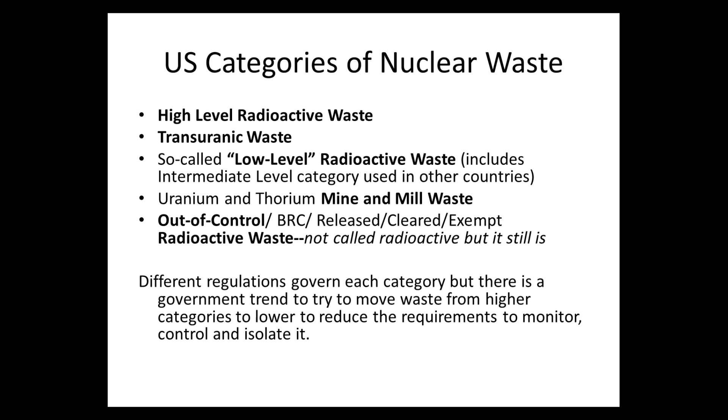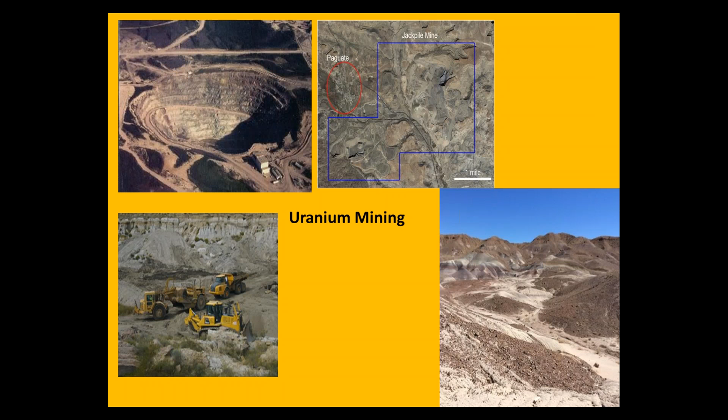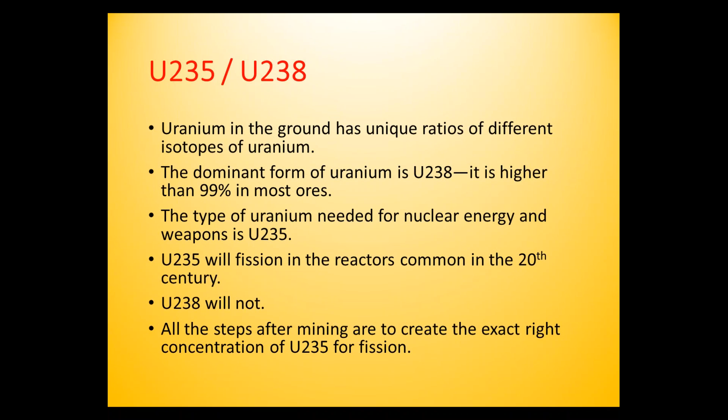Uranium, when it's in the ground, is not that concentrated, so it is mined, leaving enormous amounts of waste. There are several isotopes of uranium. Uranium-238 is the highest percent, and uranium-235, which is the lowest percent, is the one that's needed to make nuclear power and nuclear weapons. So the uranium is mined, it's milled, it's processed, it's formed into fuel pellets, which are very tiny, and then these pellets are stacked into rods that are assembled into bundles or assemblies, and several hundred of these go into the core of nuclear reactors and fission.

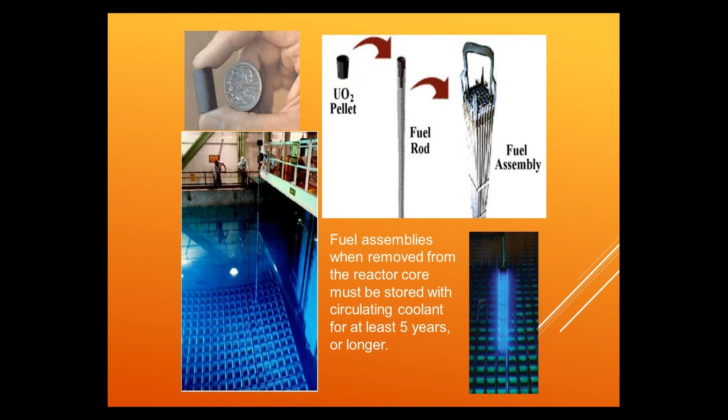The uranium-235 is split, fissioned. Its binding energy heats the water, which turns the turbines and makes electricity, and the fuel itself and the assemblies get clogged up with fission products and activation products and transuranics. So the uranium, when it first starts out, could be held in your hand, but by the time the fuel assemblies come out of the reactor, they are millions of times more radioactive.

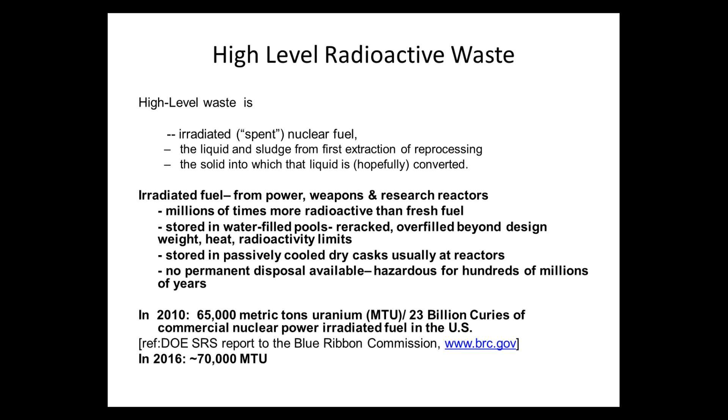The industry and government generally call it spent or used nuclear fuel. We refer to it as irradiated fuel because it is millions of times more radioactive when it comes out of the core. And in fact, fuel from nuclear power reactors really has about 99% of the radioactivity in the whole nuclear power and weapons fuel chain in those assemblies, and then sometimes it is reprocessed.

The U.S. does not reprocess now, but Gordon will talk about that a little bit. Reprocessing actually makes the problem worse because they chop up the assemblies, dissolve them in chemicals, and extract the uranium and plutonium, leaving all the other radioactive elements, cesium, strontium, iodine, neptunium, others, in a liquid and sludge. So the problem then is more difficult. So we're focusing tonight on the irradiated fuel that comes out of the reactor core.

And we can move to Gordon. We'll have Gordon Thompson now tell us a little more about the storage and management of that irradiated or spent nuclear fuel after it comes out of the reactor core. It stays in the core for maybe 2, 3, 4, 5 years, and then it is moved into fuel pools. And this is all done remotely because it would give a lethal dose in just a few seconds if people were exposed unshielded.

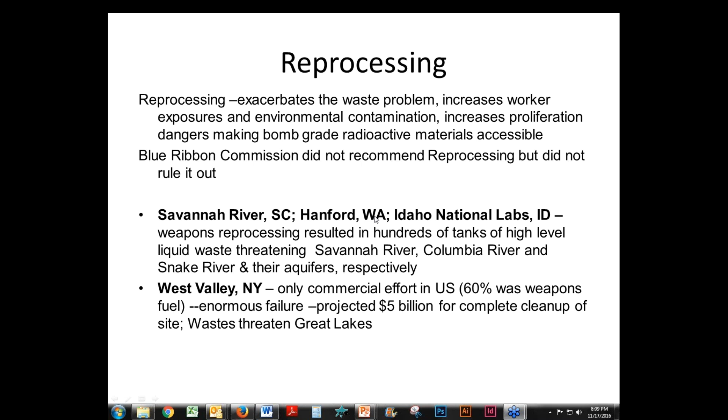So Gordon, we're transferring over control of the screen to you. Okay. Can I click on share my screen? Yes, there you go. If you want to put your slides in display mode, then you're ready to go. You want to tell them how to do that? Okay. How's that? Your notes are showing. Well, on my screen it's in display mode. So you could move the pictures on the left. Yeah. Try that one. How are we doing now? Looks the same. Let's see.

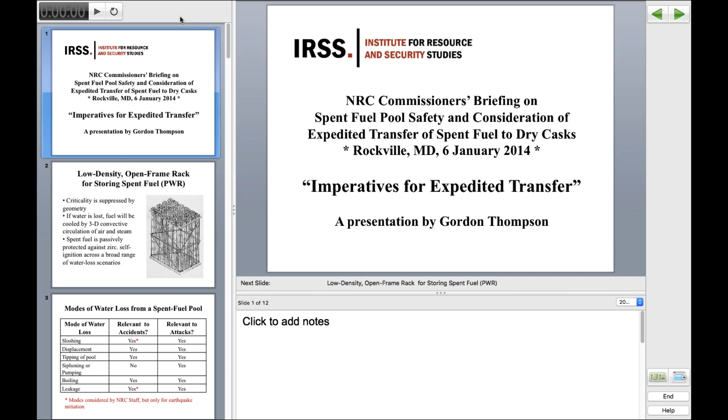Now it's not showing. On my screen it's in display mode, but I guess not on yours. No. I don't know how we fix that. Do you have it up on your machine? You could display it? Certainly, yeah. Yeah, we could show it from here. This will be my January 2014 slides. Okay. You have it? Yes, I do. I think I have it queued up right now. Okay. And I'll just tell you when to advance. Can you see what I'm displaying now, Gordon? Yep. Okay. So we're good to go.

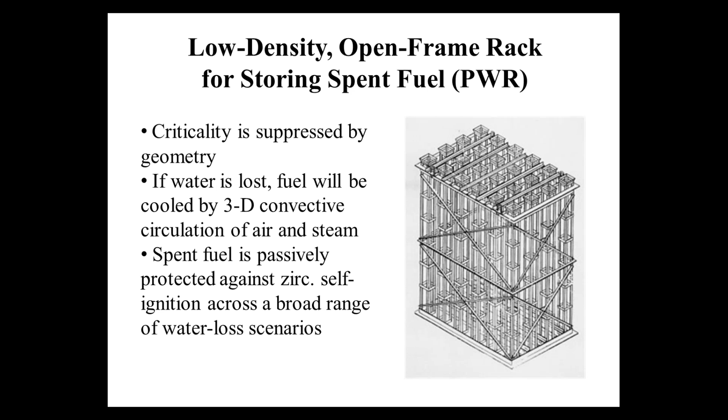The racks are closed because to suppress criticality, it was necessary to have plates of boron-containing material between each fuel assembly. That created a very severe accident potential which continues to exist today. And that potential arises if a pool loses water for any reason. Next slide, please.

And this is an array of circumstances whereby a pool could lose water. And at the Fukushima unit number 4, the top left mechanism, sloshing, was significant for two reasons. The first, earthquake caused sloshing of the fuel, and then the hydrogen explosion that occurred later in the accident also displaced water. So about 1.5 meters of water was lost from the Fukushima number 4 pool through the sloshing mechanisms.

Water was lost over time by boiling from that pool. That's the second from the bottom. And there was leakage. Fortunately, the leakage at Fukushima number 4 was into the pool by very fortuitous chance. And the outcome could have been much more severe if there had not been that inward leakage.

The staff of the NRC considers only the modes with the red asterisks, and only for earthquake initiation. So the majority of scenarios for water loss they simply don't consider at all. Next slide, please.

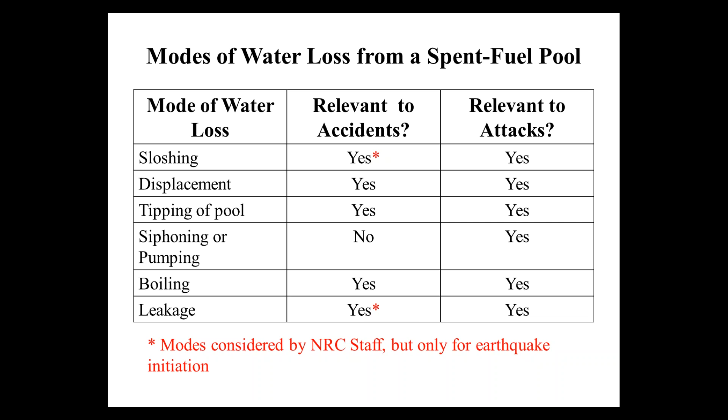This is the worst situation that arises if water is lost from a pool, and I've termed it the severe reference case. And that's where there's a residue of water in the bottom of the pool, and that residue of water prevents circulation of air, meaning that the upper portion of the fuel assemblies are cooled only by steam. As I explained earlier, steam will react with zirconium and produce hydrogen.

We actually have had an experience like this at a small scale at a plant in Hungary in 2003, the Paks-2 unit. Fortunately, that occurred in a closed vessel, but it proved the physics of what I'm talking about. Over all the years that this fire potential has been an issue, the NRC has consistently refused to study this severe reference case. So the most important case, the worst case, is the one that they simply refuse to consider. Next slide, please.

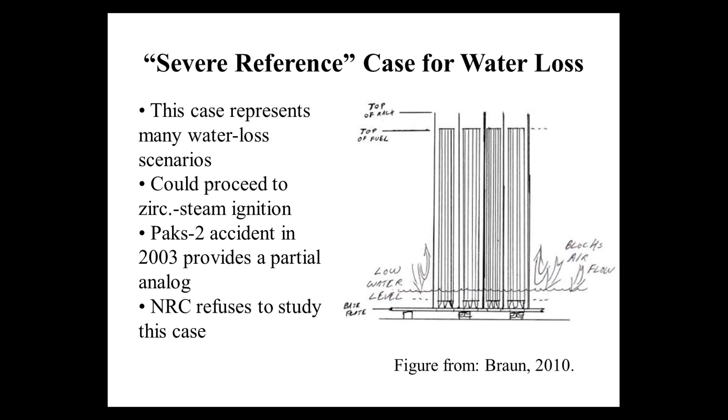Now, if water is lost from a high-density fuel pool, the zirconium cladding doesn't start burning right away. There's an ignition delay time while the fuel heats up to the ignition point. And if the fuel is aged 1,000 days or roughly 3 years, you're looking at a day or a bit less for the fuel to heat up and catch fire.

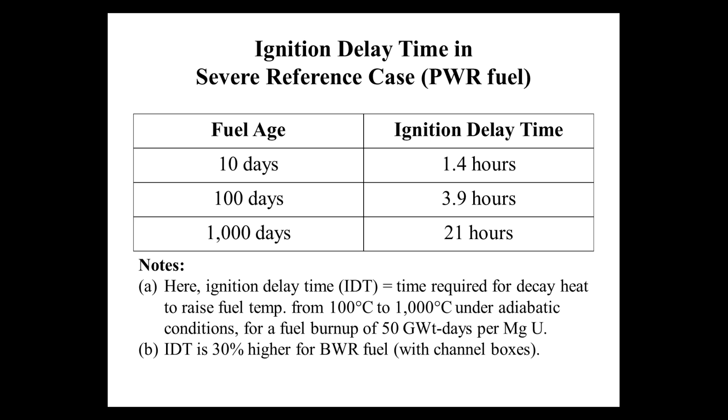So many people in the industry and in regulatory bodies like NRC say, well, no problem. If this situation ever arises, we'll just rig a bunch of fire hoses and spray water on and everything will be fine and dandy. And they do actually have now, post-Fukushima, additional capabilities to do that. They have more portable pumps and fire hoses for cooling purposes. However, they have neglected a very important matter, which is shown in the next slide,

which is that a reactor release could contaminate the site such that approach to the site would be impossible due to the extremely high radiation fields. And the numbers shown indicate just how high those fields are and how impossible it is for any human to approach. And this is extracted from testimony I gave in the year 2000 that was disparaged by industry and by NRC witnesses in that case. It was to do with the Harris plant in North Carolina.

The Fukushima incident of 2011, of course, proved the point that I had been making back then in 2000. And you may recall, those who were watching television at the time, efforts to drop water from helicopters into the spent fuel pools. And eventually a concrete pumping truck was brought up to the site and did succeed in adding water, although not terribly effectively. And as I mentioned, leakage into the pool was actually the saving factor in that incident. Next slide, please.

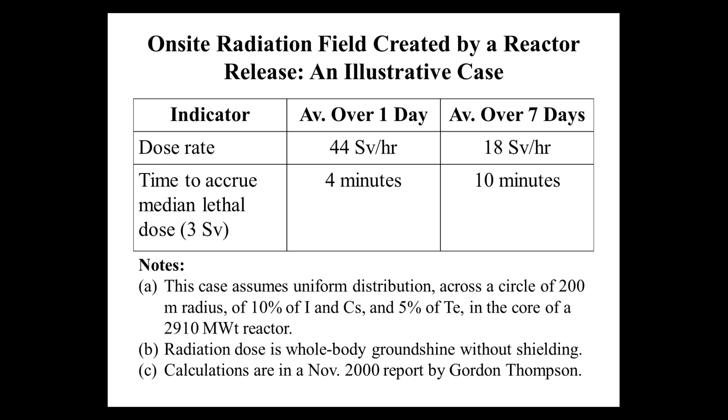So what do we have to worry about here? Cesium-137 is the key isotope to worry about. It has a 30-year half-life. In its decay, it produces a very intense gamma radiation. And the amount released at Chernobyl in 1986 was approximately 85 petabecquerels of this material. Petabecquerel is 10 to the power of 15 disintegrations per second. It weighs about 300 grams. You could hold it in your hand, but you wouldn't live very long if you tried.

The fact that such a small mass produces such dramatic effects is instructive about the hazard of nuclear power. Best we can tell, at Fukushima, about 6 petabecquerels fell on Japan out of a total release that has varying estimates. The one I'm quoting is 36 petabecquerels. There are still ghost towns in the Fukushima fallout zone. I was actually in one about a month ago, a deserted ghost town, Tomioka.

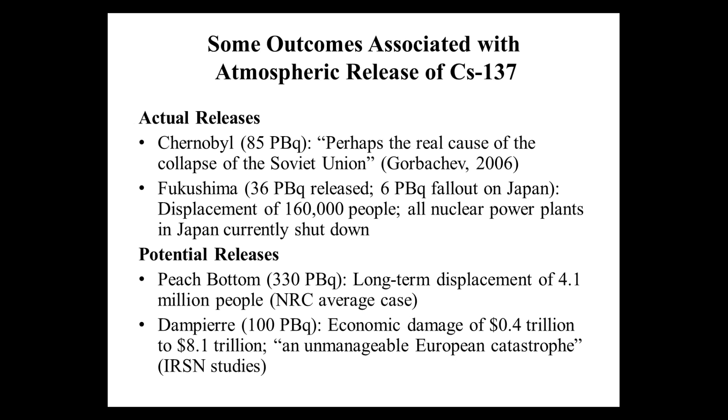The French Research Institute, the IRSN, looked at a potential release of 100 petabecquerels at the Dampierre site in France. This is a reactor release, and concluded that that would be, in their words, an unmanageable European catastrophe. So how much is available for release? Next slide, please.

Peach Bottom, 2 pools, each with more than 2,000 of these petabecquerels. And Fukushima Unit 4 pool, about half that much. And the ghost towns in Japan that I was visiting come from a release of 6 petabecquerels. And of course there are many, many acres of waste dumps of contaminated soil that the government is piling up in the Fukushima zone. A single dry cask in this last case is a little under 70 petabecquerels. Next slide, please.

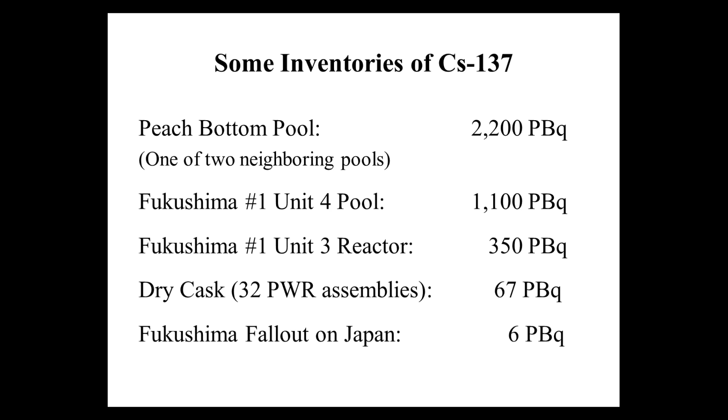So the NRC refused to act on this problem because they say the risk is low. And they define risk as the product of probability and consequences, under the claim that that's a scientific definition. I regard it as ideology, and testified to that effect to the commissioners, who were not persuaded. Both probability and consequences are difficult to estimate, particularly probability. If deliberate action is possible, then it's exceedingly difficult, potentially impossible, to assign a probability.

And at the bottom, I point out that, as I said earlier, the NRC has refused to consider the most serious case. They made an assumption that the only safety issue was rapid instantaneous loss of water from the pool. And it's remarkable that they made the same error back in the 60s in terms of reactor design, focusing on something called the large break loss of coolant accident. And that's why we have such badly designed reactors and containments, because they made a similar error in the 60s.

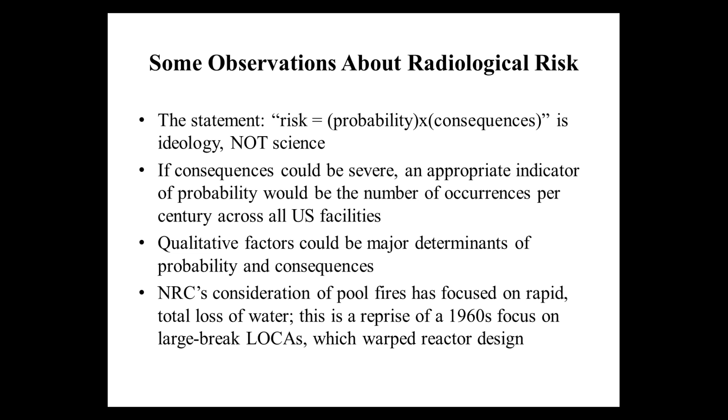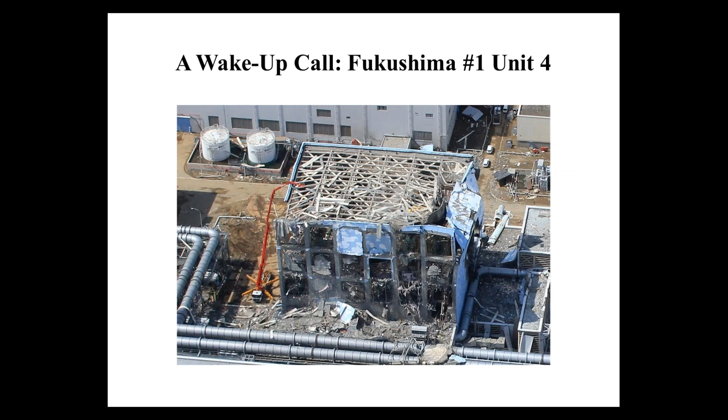Next slide, please. Here's Unit 4. As I described, the pool is in there somewhere. You'll see the concrete pumping truck on the left. Next slide.

And switching to open frame racks, to do that, we'd have to transfer fuel to dry casks. Donna's going to show you lots of pictures and talk about dry casks. The spent fuel is going to have to go into those anyway. You can see this happening at plants all across the country, and at decommissioned plants like Maine Yankee, the dry casks are all that's left on the site. And the cost of this transfer is actually simply the cost of money, the incremental cost of doing it now. So the cost is scarcely an issue, and the potential consequences are vast. Next slide.

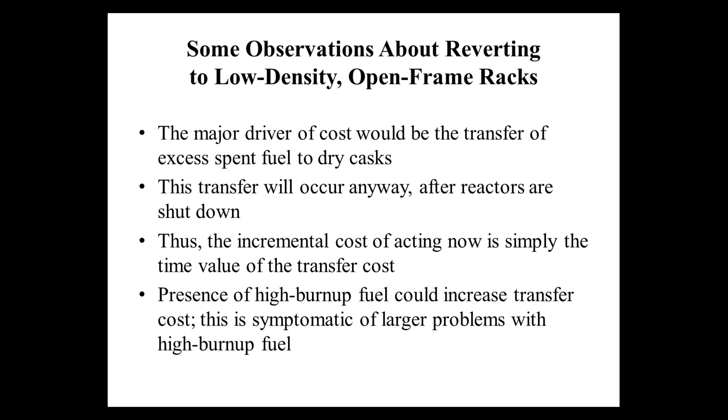And this is the final slide. I'm saying here that the commissioners should scrap the studies done by the staff, the NRC staff, and that's true of similar regulators elsewhere; the nuclear industry has never done an open science-based inquiry into the hazard I've just described. But that hazard exists in many places. There's a major example in France of the La Hague reprocessing plant.

And on a personal note, I first became aware of this problem in 1978, and testified to that effect in Germany in 1979. My findings were accepted, and the state government at that time refused to permit high-density storage of spent fuel at the Gorleben site. So I've been pushing on this issue for now 38 years, and have never encountered on the part of industry or regulator a scientific response. So if anyone tells you this is a fast-moving, cutting-edge, science-based industry, I can tell you from personal experience that it's anything but. Thank you.

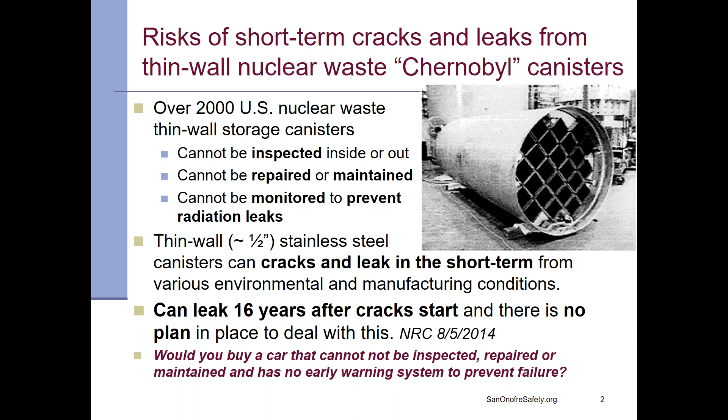When you're explaining this to people and they're reluctant, say to a city council, to sign a resolution, put it in terms of a car. Wouldn't you expect to at least be able to inspect, repair, and maintain or prevent a leak just like a car? Elected officials don't feel qualified to make recommendations for dry storage, but we successfully convince them to sign resolutions for these basic requirements. So that's a suggestion there.

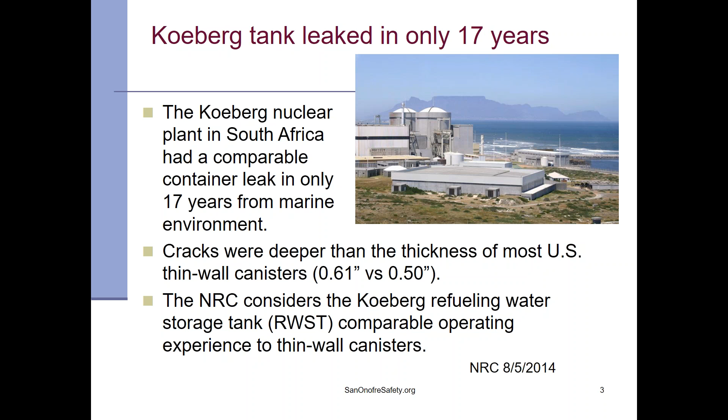Now what was even more shocking is the Koeberg nuclear plant in South Africa. It leaked in only 17 years with cracks deeper than most canisters. There's very little operating experience for the spent fuel canisters because the thin wall ones haven't been used that long, so the NRC looked for similar components they said were comparable. They've been trying to hide the fact about this Koeberg plant, so please share it.

Also, the NRC thought it would take 30 years before canisters were cool enough that salt would dissolve on the canister and start corrosion cracking. But then they hired EPRI to check the temperature on a few canisters, and at Diablo Canyon, a 2-year-old canister was already cool enough for the moisture to dissolve the salt. EPRI, which is a utility lab, is even trying to hide this information.

Below on the left is a picture, you can see the men working. That's an air vent. The thin canister is inside, and because the fuel is so hot, they have to have air vents in the concrete outer overpack cask in order to cool it, and it's cooled by convection cooling. So if that thin canister was to leak, you've got a nice convection cooling that can distribute any airborne gases. On the right is some of the highly corrosive salt they found on the Diablo Canyon canister.

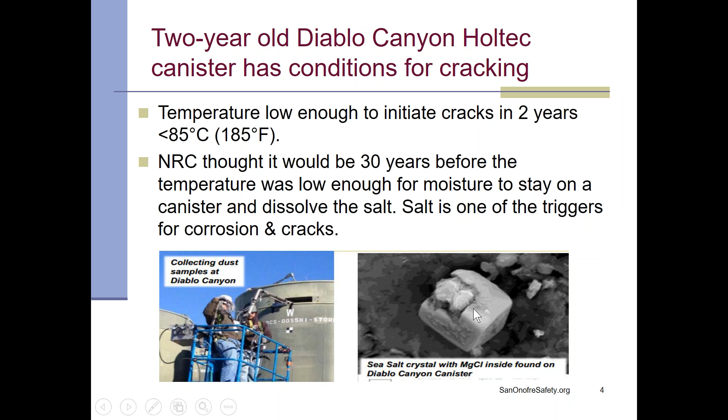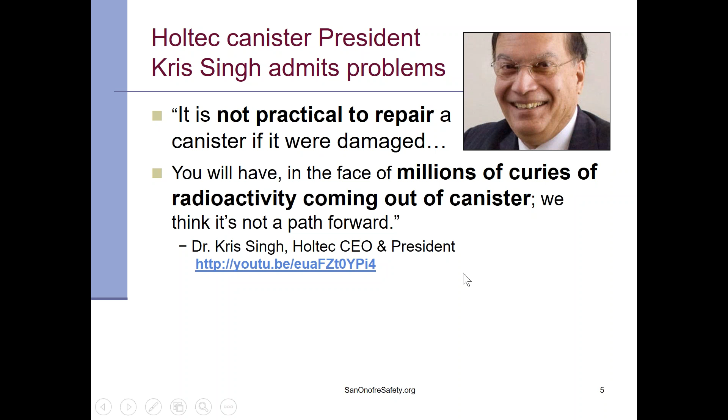We even have the president of Holtec, which makes and sells these canisters, admit in a public meeting that it wasn't practical to repair it even if you could find the crack. He said it just introduces another area for corrosion, and that you would have millions of curies of radiation coming out of the canister with even a microscopic through-wall crack. The link there is to a video of him making these statements at a Southern California Edison public meeting.

Let's see, come on, page down here. Oops.

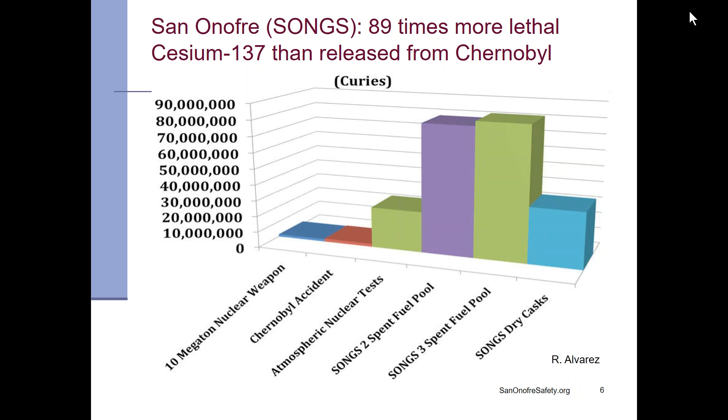Now, I don't like to find problems without having recommended solutions. So I did a lot of research and talked to a lot of professionals, and basically most of the rest of the world is using canisters that don't have the problems of the canisters we standardized on in the U.S. The thick walls are 10 to 19 inches. The Areva thick casks are the 10-inch, and then the Germans have a ductile cast iron, which doesn't become brittle, up to 19 and 3/4 inches. The thick casks don't crack.

They're maintainable, you can get close to them to do repairs and inspect. They have metal seals, double metal seals, double lids. You can inspect inside and out. The early warning monitoring is continuous, and it's a type of monitoring where you can prevent leaks. They have pressure sensors in between the seals, and if there's a pressure change, that's an indication they may need to replace a metal seal.

On the thin canisters, they don't have the ability to do that. They have temperature sensing, but that's not going to give you any warning to be able to do anything. And they're only required once every quarter to check radiation levels, somebody walks around with a monitor on a stick to check radiation levels.

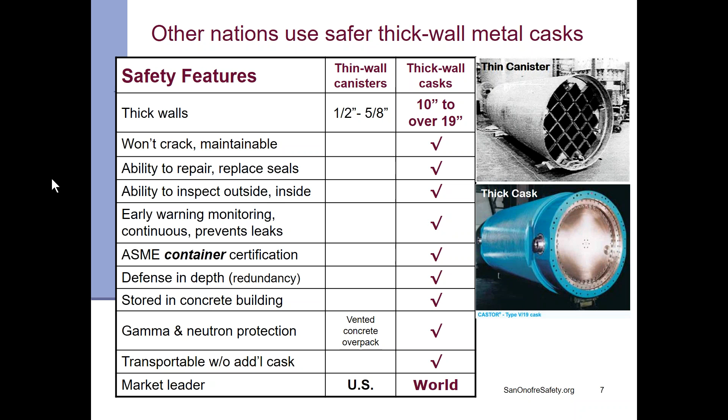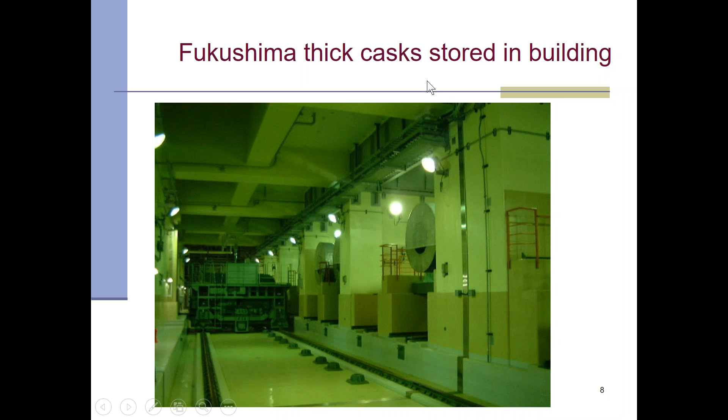Okay, now the Fukushima plant used thick casks. They're about the 10-inch ones, and they stored them in a building. In Germany, they use thick casks in buildings. They've been in use over 40 years.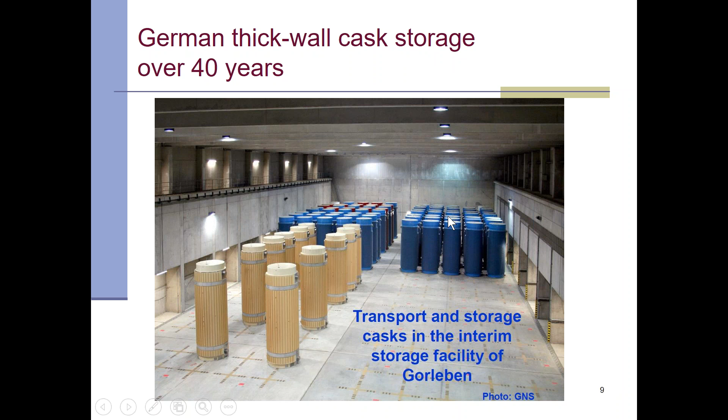When the industry talks about how many decades we've been storing dry storage, the ones that have been used for decades are the thick ones, not the thin ones. And when they say that they haven't had any problems, they don't know if they've got problems because they can't even inspect the outside. So yeah, they're right - they're not aware of any problems because they can't see them if they're there.

Okay, and I tried my best with Mark Lombard. He's the director in charge of approving all nuclear waste canisters for storage and transport. I made a presentation, he invited me to make a presentation, and well, just like with Gordon, you know, it's hard to make progress with the NRC. So they're ignoring regulations - they know the transport regs, yet they continue to approve these thin canisters.

They know the Nuclear Waste Policy Act requires monitored retrievable storage. Mark Lombard personally told me, oh, that's the DOE's problem. He's just ignoring it. They've got this new NUREG-1927 Revision 1 document where they've added aging management, but they don't put anything specific enough. They say a canister that has a 75% crack has to be taken out of service, but it's impossible to even do that. They've got no path to do that, but they don't talk about that.

Regarding when they license canisters initially, they ignore anything that might happen after 20 years in their approval, and I have this in writing. And you know, I asked Mark, I said, Mark, now that you know the fuel has to stay on site indefinitely, why don't you raise your minimum storage standards? And because he knows the problems, he says, well, it's NRC policy, you know. And I said, well, who set that policy? And then he told me he did.

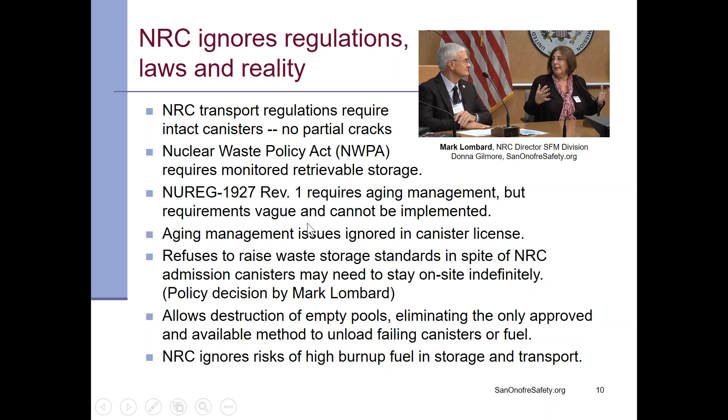It's never actually been done, but that's the only process they have that's approved. And the NRC ignores the risk of high burnup fuel in storage and transport. High burnup fuel is over twice as radioactive, over twice as hot, and unstable in storage and transport. High burnup fuel is basically fuel that's been enriched with a little more 235, and it's allowed to burn longer in the reactor to make them more money. Unfortunately, it can cause the zirconium cladding to become brittle.

Marvin Resnikoff, and I, did the report we did, he said that it becomes brittle, it can shatter like glass. So in transport, this could be a really big issue. Can you just see it going across the rails? The NRC is having, I forget which lab it is, do tests to see how much shaking the fuel can take, so they're still researching it.

Yucca Mountain was never designed for high burnup fuel. High burnup fuel can damage cladding after the fuel is already in dry storage, but because they're welded shut, we have no idea what's going on. Per Peterson, who is one of the nuclear engineers on the Blue Ribbon Commission, our California governor looks at him as one of their gurus. He did not know that high burnup fuel could cause cladding damage after they were in dry storage. So I was able to inform him - Marvin Resnikoff and I informed him of that, and I gave him a reference, and so he now agrees with that since he has the reference for it.

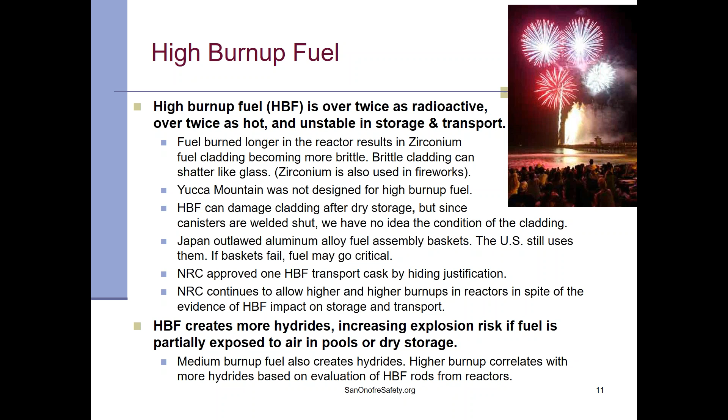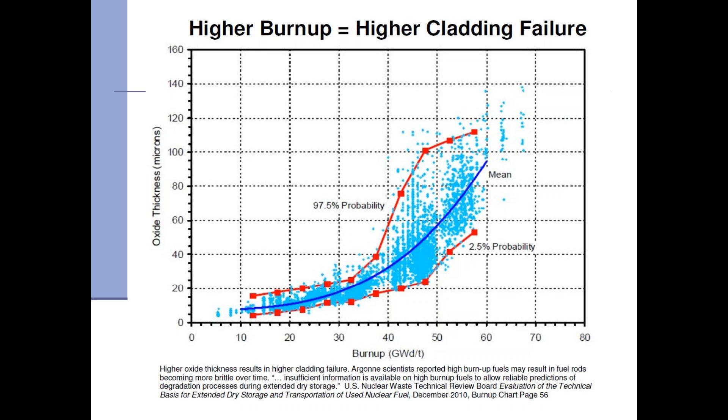High burnup used to be defined as about 35, and they keep changing the definition on it. So the industry says they don't have any real data, only experimental data on high burnup fuel impact, but they do, and this was a study with the actual data. Now, there's another chart I don't have here that correlates the amount of hydrides with this oxide thickness.

Now, locally here at San Onofre, we've been trying to fight the thin canisters here locally at the state level. Our coastal commission - I was able to educate them with the problems, but they gave them a permit anyway.

But they want them to say, okay, they understood the problems, but you just have to promise to fix these in 20 years. So it's pretty nuts. And then Edison decided to go with this Holtec UMAX system, which is even worse than the other ones. And they're using a design that isn't even matching the specs. Anyway, I don't want to go too much into this, but if you come to the event, we can go into more detail about this problem.

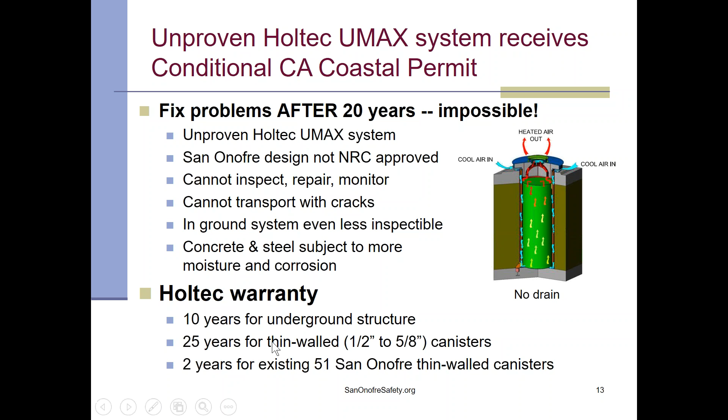But look at Holtec's warranty for this great new wonderful system. 10 years for the underground structure, 25 years for that, and they want to take our existing horizontal thin canisters and store them vertically in this Holtec system, which is a whole nother can of worms. But this will give you an idea of what we're faced with here at San Onofre. You can see the canisters.

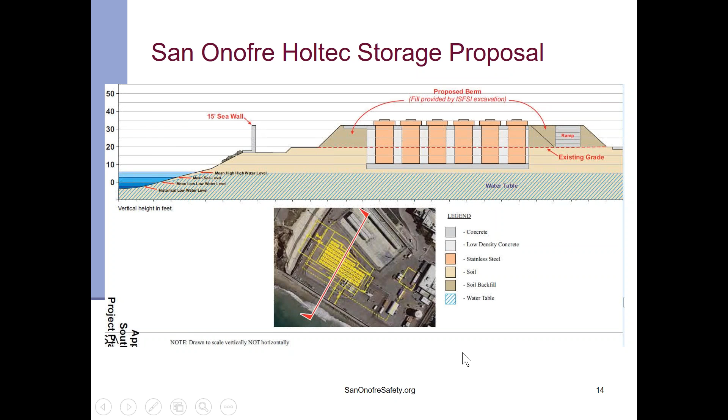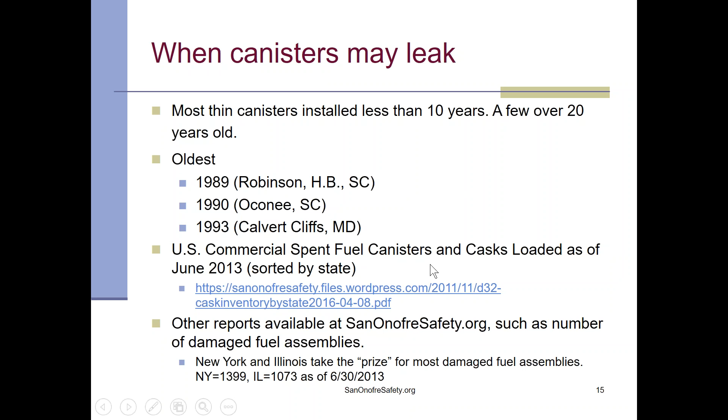Now, when are your canisters going to leak that are near you? Well, most thin canisters have been installed less than 10 years. A few are a little older. I've listed the oldest ones here. There's a report by state where you can see how long your canisters have been loaded in your state and some other information about them. There's other reports available at sanonofresafety.org, such as damaged fuels, and I'm hoping maybe people in New York and Illinois can make some hay with the damaged fuel assemblies they have. They have a record number of damaged fuel assemblies in New York and Illinois. This data is from the Department of Energy.

Now, what about consolidated interim storage? New Mexico, Texas, and DOE plans, they're really planning the same system. They've taken the existing cans that are loaded, and they already have cracks, can't repair them, and they're just planning to take those. They're not going to have a pool. So they're assuming nothing's going to go wrong. They haven't addressed the transport infrastructure problem. These basically are so heavy they're going to have to go by rail. There's a letter that the New Mexico governor wrote where she said she was okay and one of her communities wants a facility since these are perfectly safely stored, and that's right in her letter.

And there's the same inadequate aging management plan. And what's the point of moving these to a new location and just taking these serious transportation risks and loading and unloading risks, if there's no advantage? I've been trying to get the local citizens here focused on the quality of the canisters. But Edison has been giving them this hope that we can just get this stuff out of here, and a good percentage of them, that's all they care about. So it's really tough to get everybody on board with fighting for better containers.

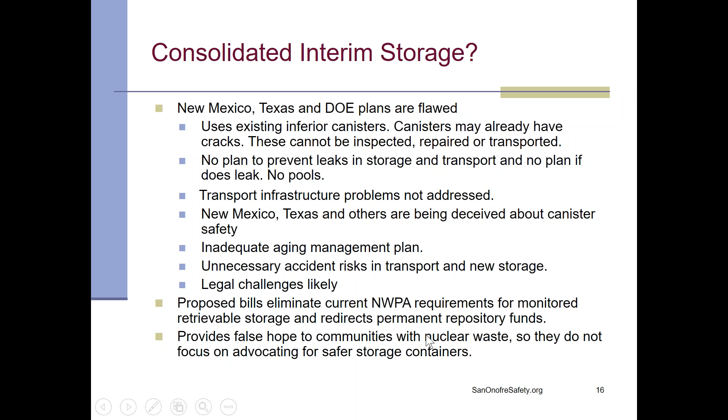And the proposed bills they're supporting, a lot of people are supporting. If you look at what's not in the bill, it's replacing the Nuclear Waste Policy Act. It's eliminating the few safety requirements in there for monitored retrievable storage. Recommendations: we need to get this information out, and I guess I'll go ahead and read this. We need to have higher standards. If we can start with city councils, counties, or the highest level we can get to have these minimum requirements that anybody can understand, to be inspected, maintained, repaired, and be able to continuously monitor to prevent radiation leaks. That should be part of the design. And I think we can do that.

One of the problems is I don't think I've gotten high enough in the chain to the people that are really making these decisions. Has to be above the NRC. And we need to have them stop destroying the pools. They assume nothing's going to go wrong, and I have the documents they're using to base that on. And that's something else I can talk about at the larger session. There's so many problems with those documents, it's a joke. We need canisters that don't crack.

We need to include the HOSS, the hardened on-site storage safety security standards, in there. And we need to stop installing these thin canister systems and stop making more waste. I made a cost-based case with the California Public Utilities Commission, showing that the thin wall canisters will actually cost more because they will not last as long, and there's no decommissioning money for that.

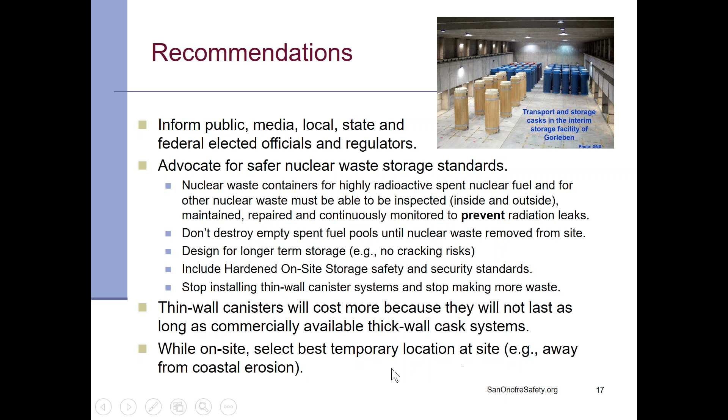The judge ruled that I made meritorious arguments, which meant I legally made my case, but she said, oh, it's not their jurisdiction, which it really is, because cost is strictly a state issue. And while on site, this should be part of a resolution to select the best temporary location at the site, such as away from areas of coastal erosion, and in the best quality.

Well, the NRC, I don't think has ever not approved a facility. So the one in Utah, they approved that one too. It never happened because the state stopped it. So I'm assuming eventually the NRC will license those, but you still have the transportation issues. You still are going to have lawsuits.

I'd like to hold out some hope that if we could get to somebody in the Trump administration high enough up and let them know that they could lose. Well, I guess they wouldn't lose Manhattan if it's there, but if they can be educated and believe the problems with these canisters, maybe we can turn this around a little bit. And it may be optimistic, but it's definitely worth the fight.

And there's lots of problems with those interim facilities. I actually wrote to the governor of New Mexico and talked to their staff and pointed out the problems, but I didn't get anywhere with their staff. They're just kind of ignoring it. So anyway, I think that lawsuits or anything we can do to slow it down, but given their track record, the NRC eventually approves anything.

To Gordon, can you address defenses against attacks on dry casks to prevent zirconium ignition, a la robust storage in 2003? That's from Kevin Kamps. Sure. The thick cask is better, as Donna said, from the point of view of long-term durability and inspectability. It's also better from the perspective of attack. And Donna quite rightly pointed out that in other countries, Germany especially, they use thick-walled casks stored inside buildings.